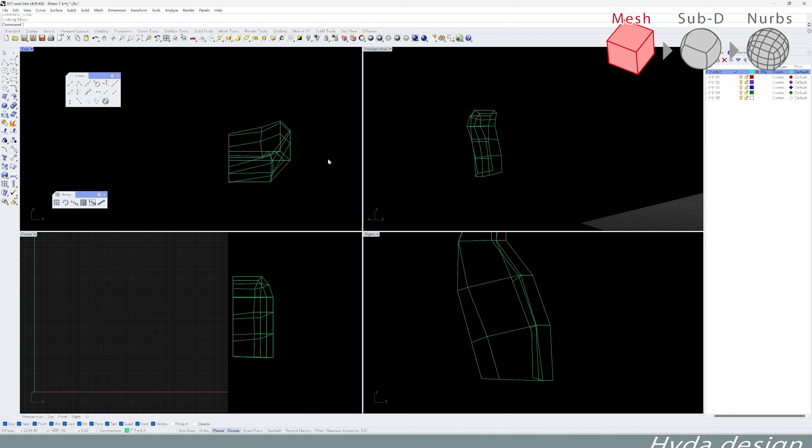Today's main content is the presentation of modeling research.

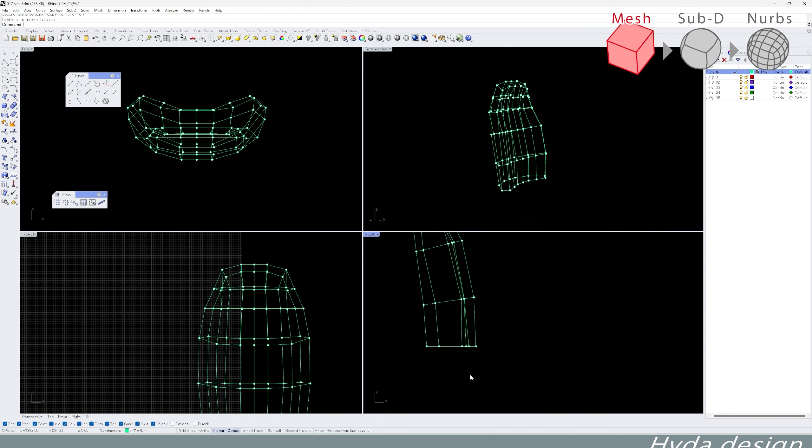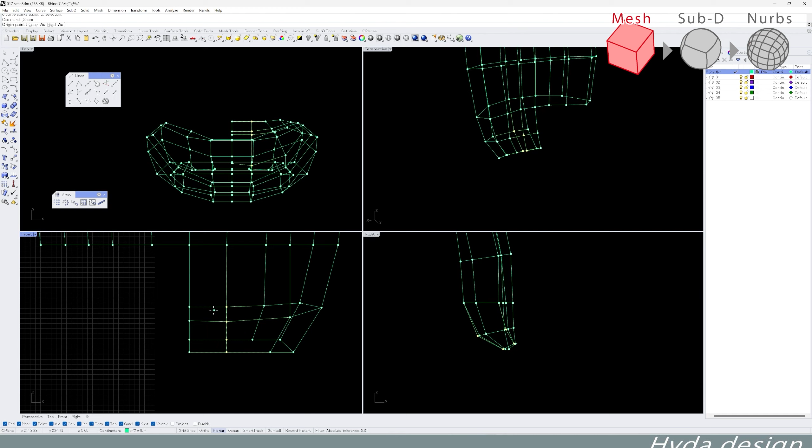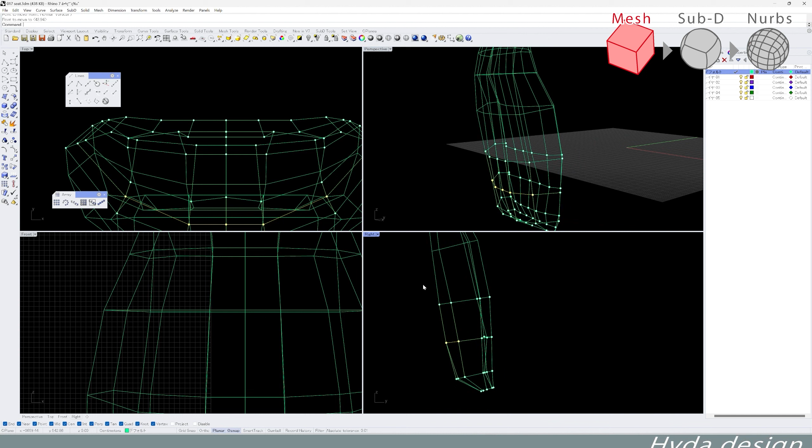Last time, I introduced a method of creating a mesh from a wireframe, then converting it to subdivisions, and then converting it to a NURBS surface. I thought it would be easier to understand if the method had a name, so I tentatively decided to call it the three-shift method.

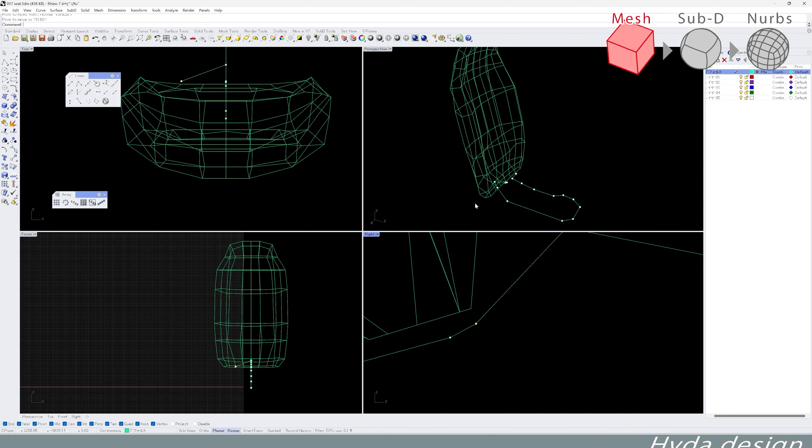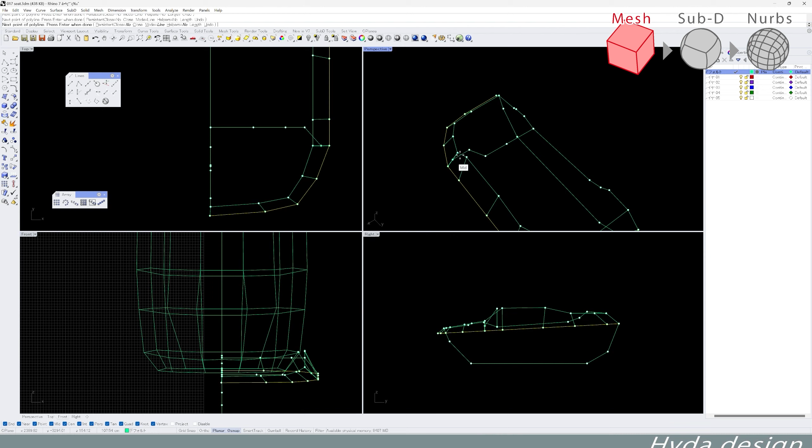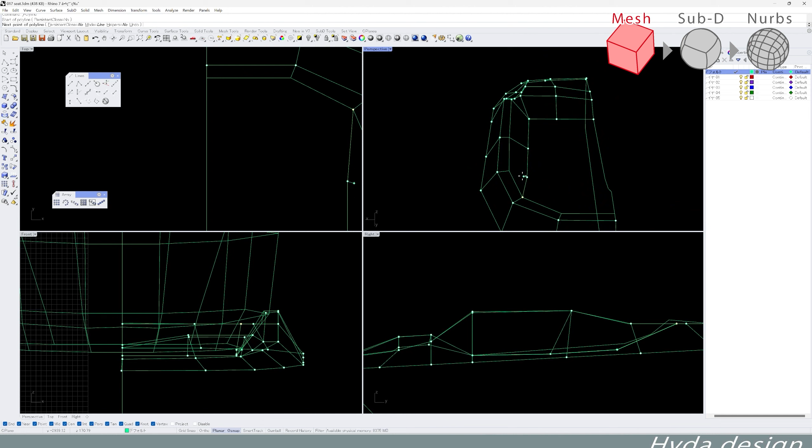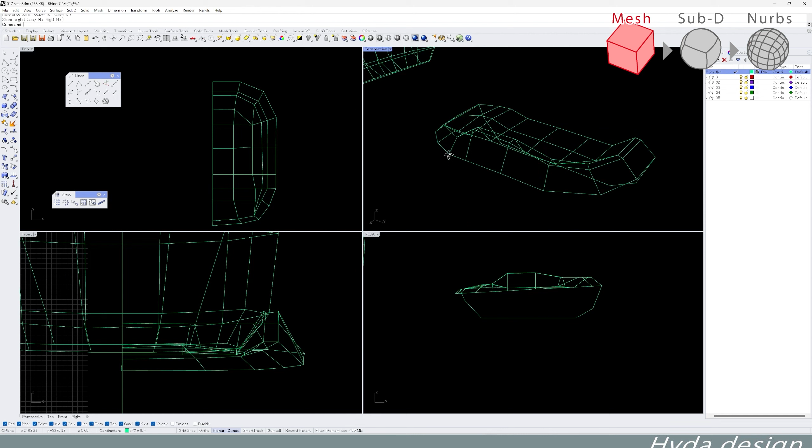Now I'm creating wires to make the mesh. I think the advantage of this is that it is to draw a line on 3D. To create a mesh with Blender, we need to add lines of mesh one by one, but I think this method is intuitive because we can draw lines directly with this method.

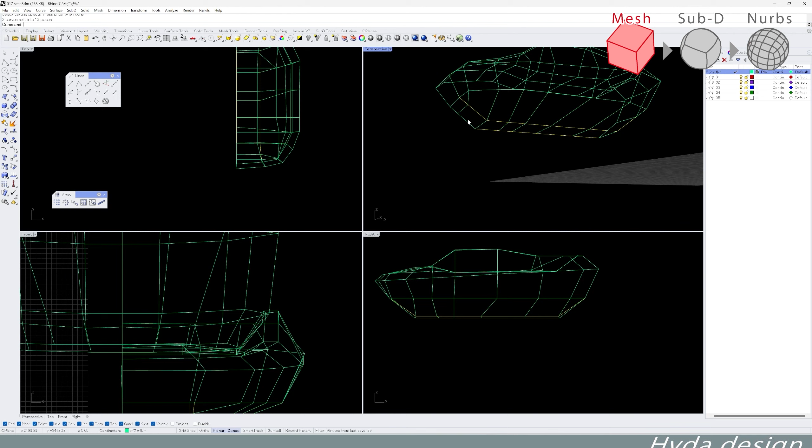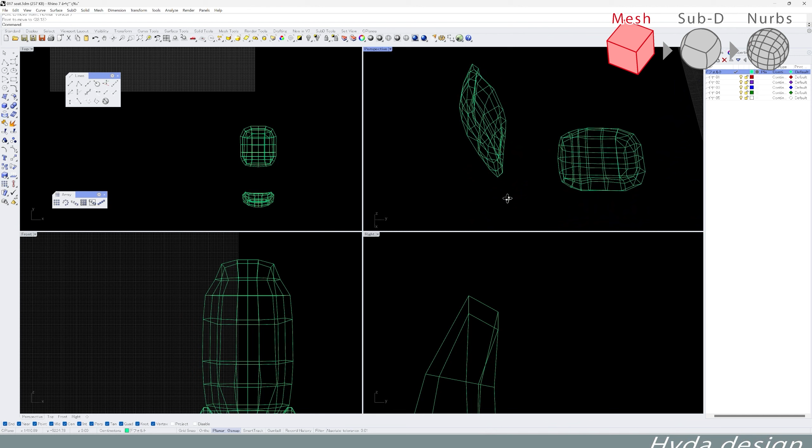We can create a style while balancing the contours in the space. This has the function of a rough sketch. Therefore, I think it is suitable when you want to design while exploring the original shape instead of tracing.

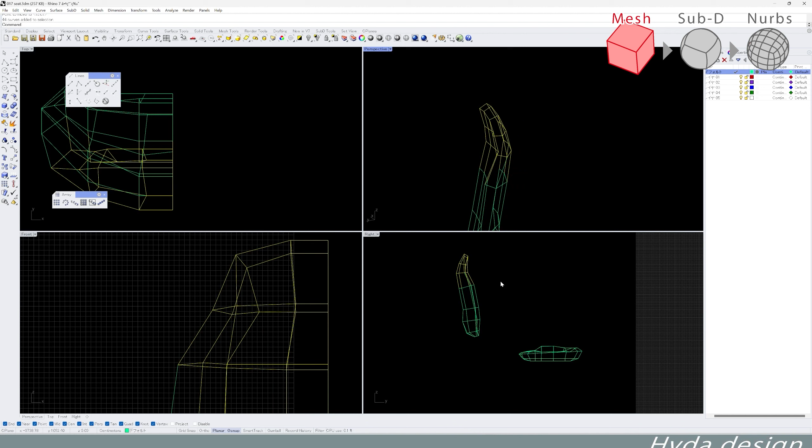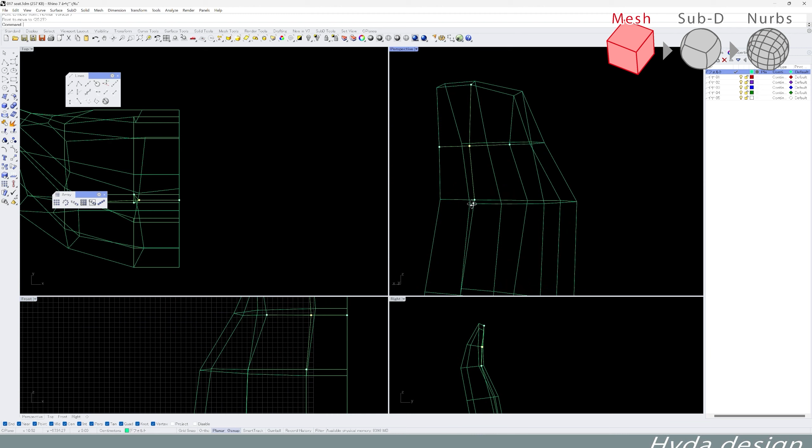And the alignment tool is useful at this time. You can create a smooth mesh by displaying all the points and using the alignment tool to arrange them neatly on a straight line, and then using shear and rotation to create a shape. That will also lead to creating a clean subdivision surface afterwards.

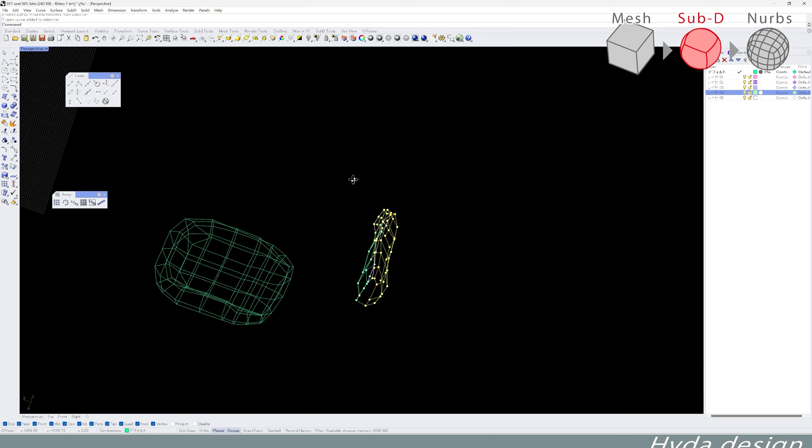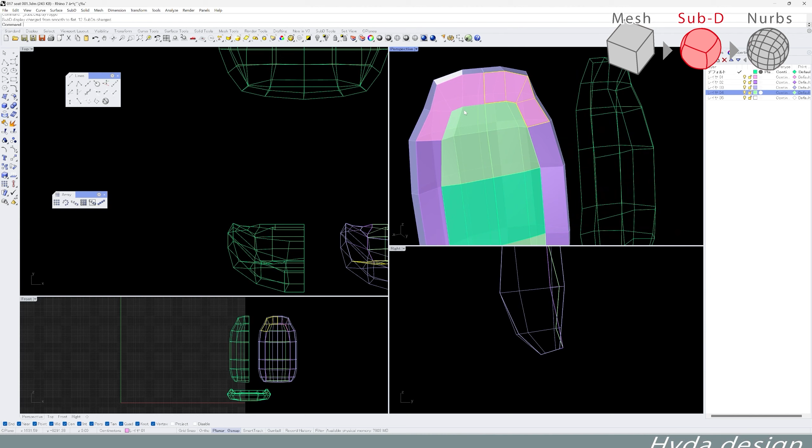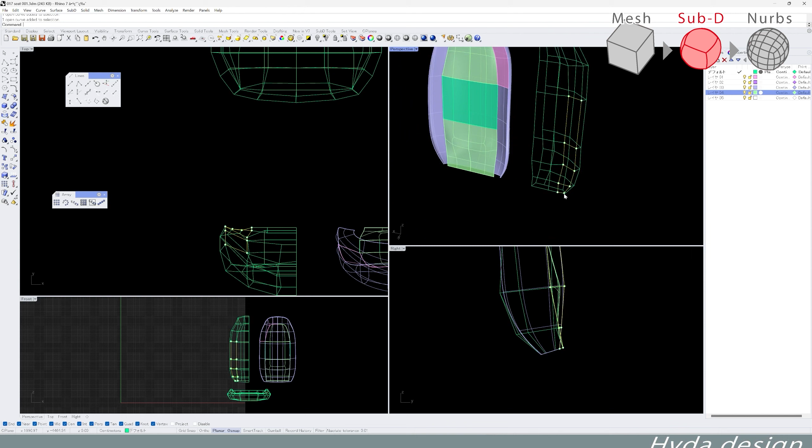Entering the subdivision phase. Edge lines cannot be expressed if the meshes are grouped together. Therefore, it is necessary to separate each mesh where you want to put out the edge line. So we have to think in advance which edge line to leave.

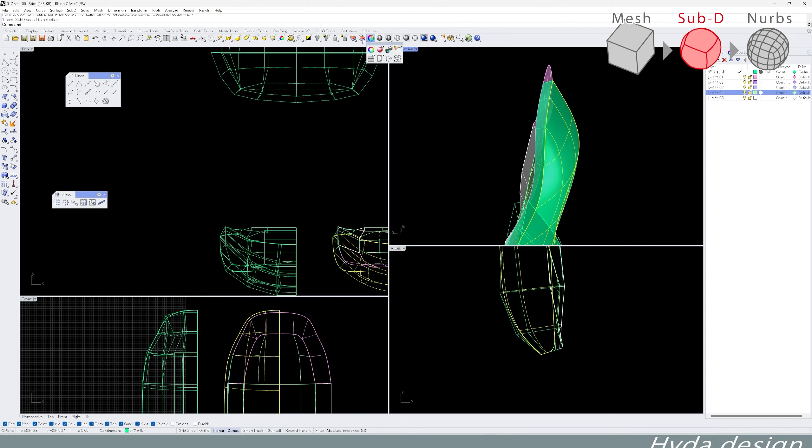This time I want to make the edge of this edge line stand out, so I made the edge part a separate mesh group.

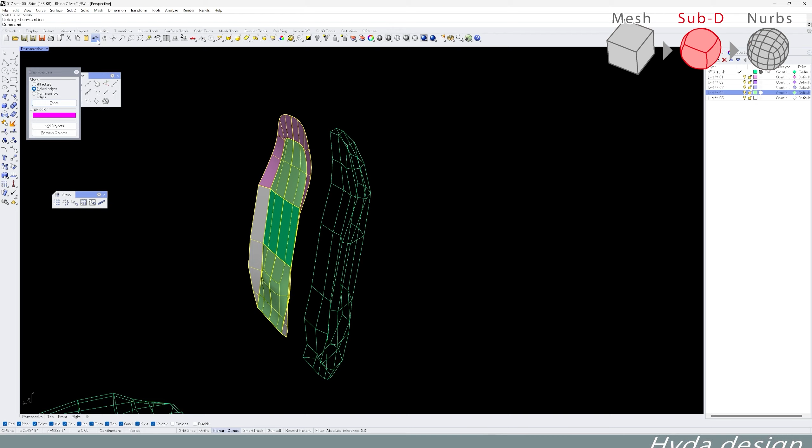I made a mistake in dividing the parts so far, so I'm redoing it.

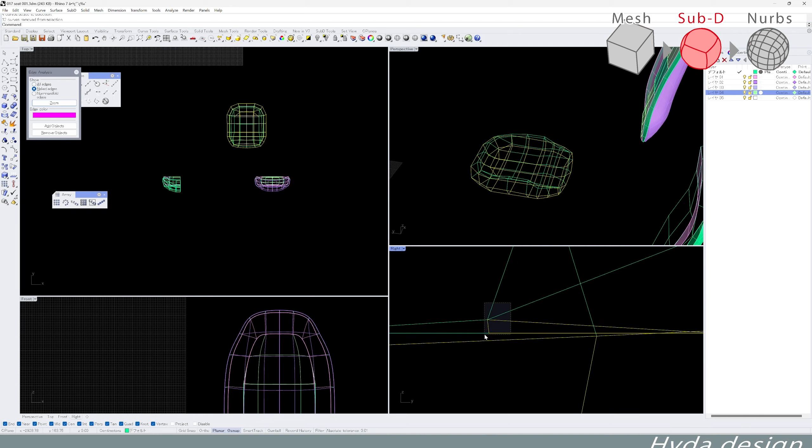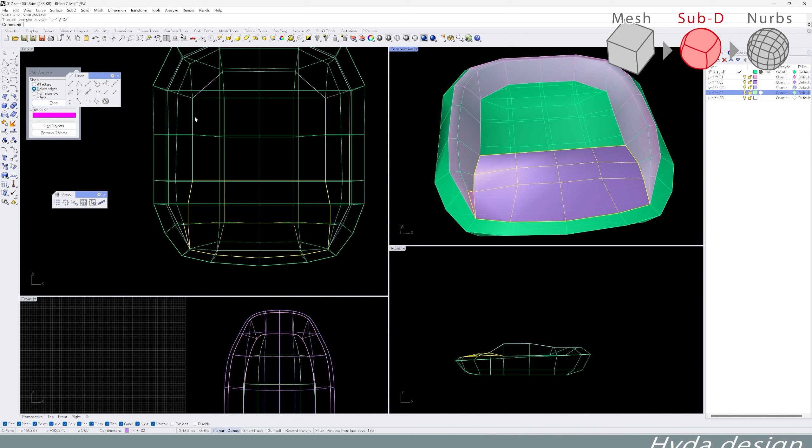Next, attach the mesh to the seat of the bottom in the same way. I create meshes with the image of separating parts with seams as edge lines.

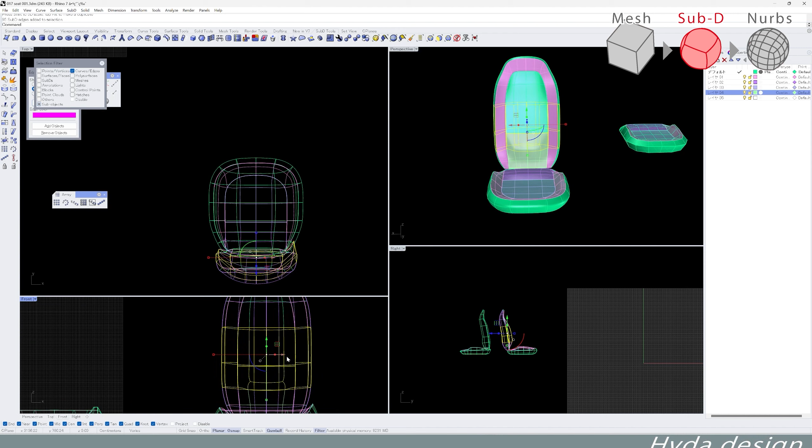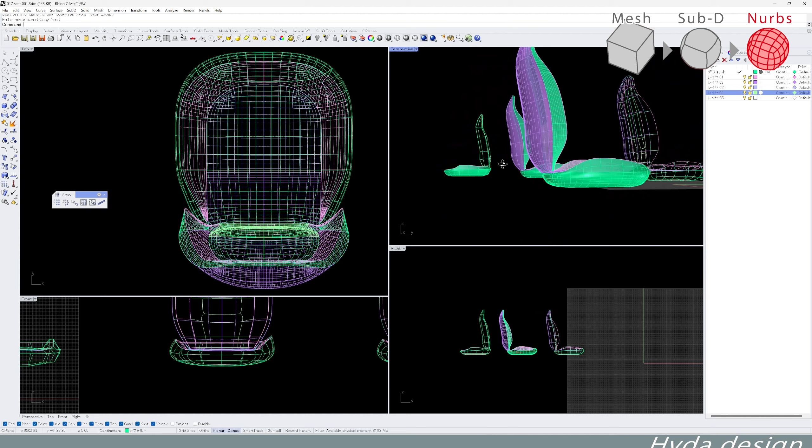In this subdivision phase, the embankments on both sides were not enough, so I used the subdivision editing tool to create the embankment. Such adjustment can be made at this stage.

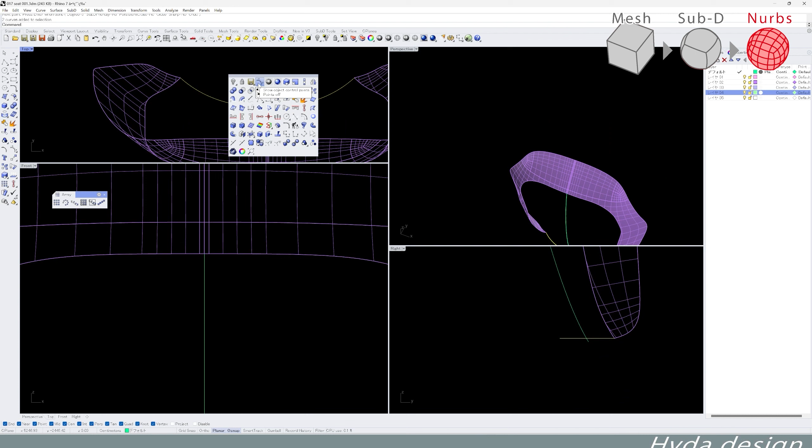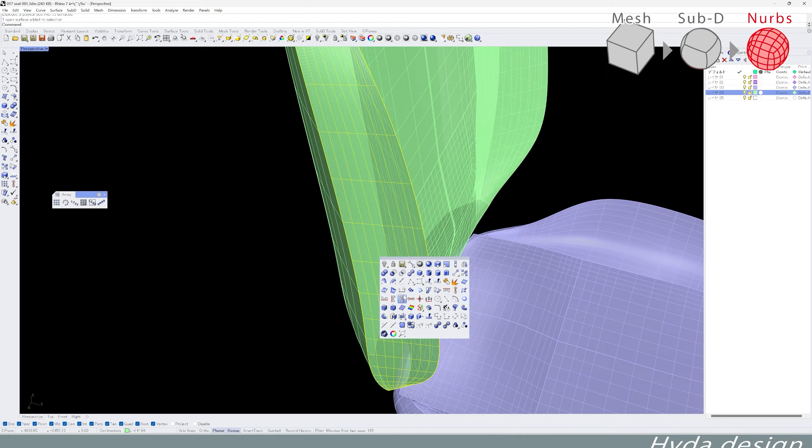Next, we are in the editing phase of the NURBS surface. In order to reduce the volume of the back, I'm going to trim it a lot and reattach the surface. I think the seams of these edge details will be easier to achieve the desired shape.

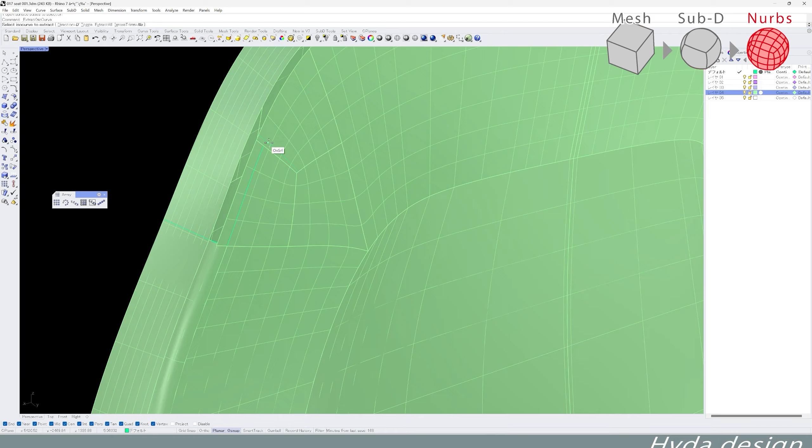Two-rail sweep or network commands are often used in this part.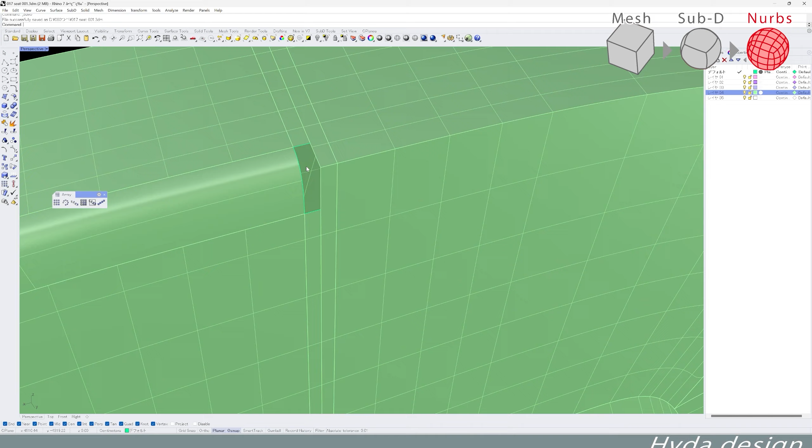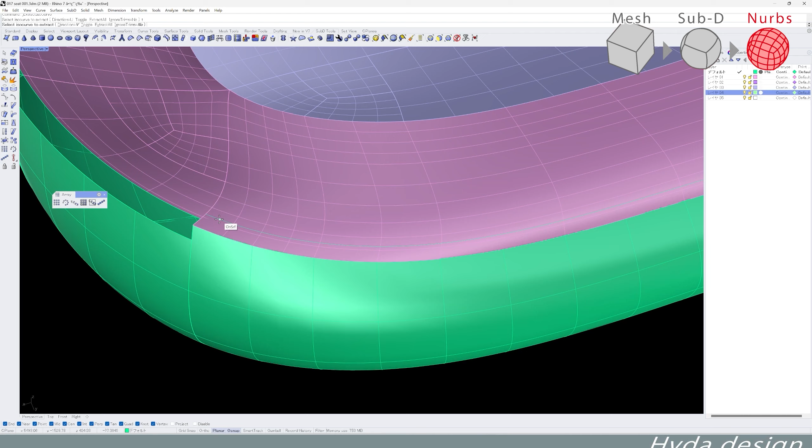I think that filleting in subdivision often does not go as intended because it is done automatically by the algorithm. So at this stage, I think it's recommended to create detail in this NURBS surface phase.

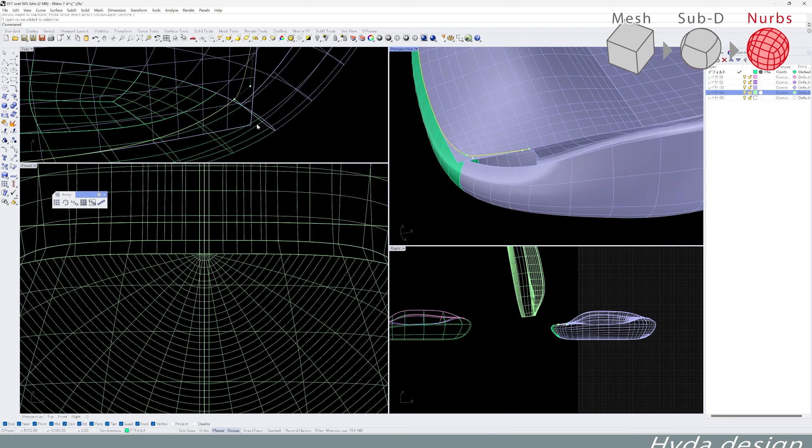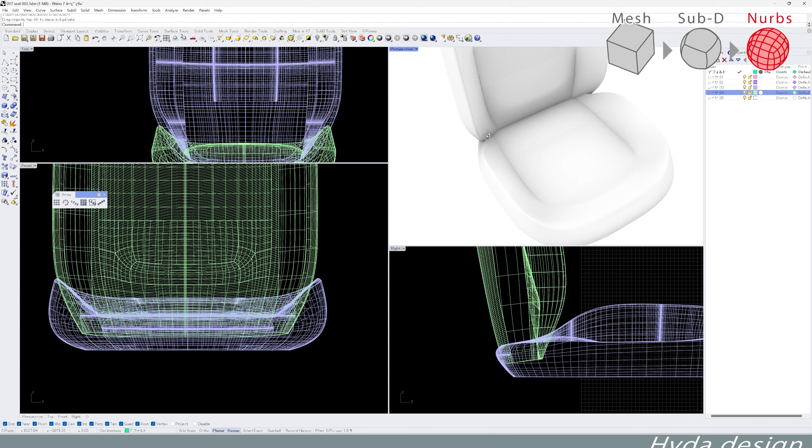If there was such a gap of the edge line, I would like to align it. I think that the cage edit command is effective when making such overall adjustments in this phase.

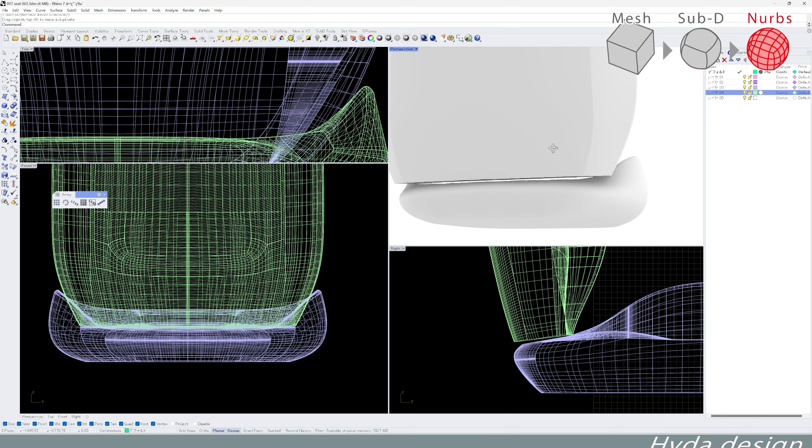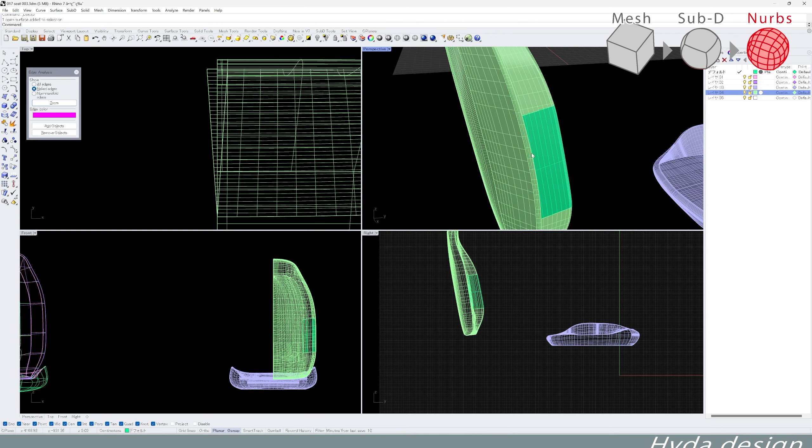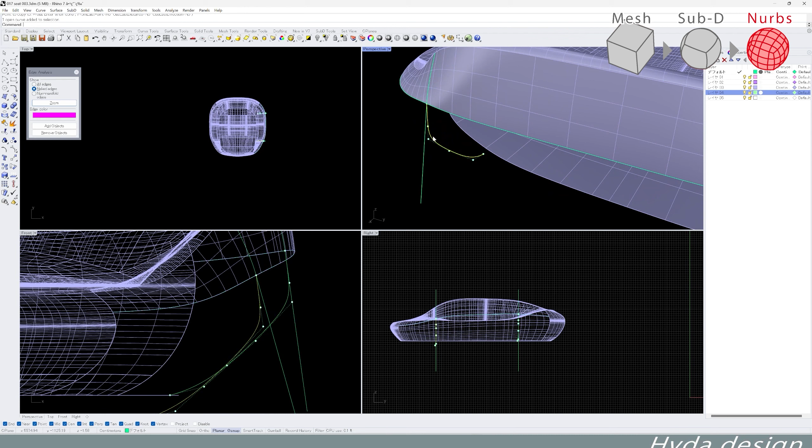The shape of the overhang on this side drew a gentle curve, so I thought when I wanted to make it a straight outline, in such a case, we can adjust by trimming the face you don't like and replacing it with a new face in the meantime.

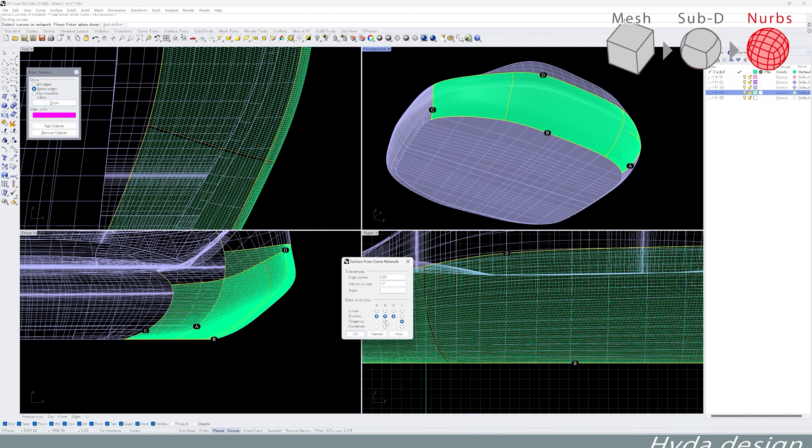If the skill for that change is up at the time of the subdivision phase, such a drastic adjustment may not be necessary for the NURBS surface phase instead of the subdivision.

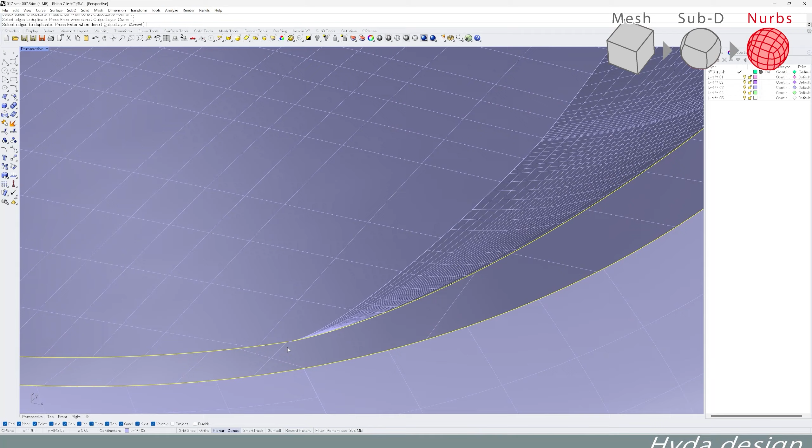Seam modeling can be expressed by trimming the seam location and creating a surface that cuts into it using the two-rail sweep command.

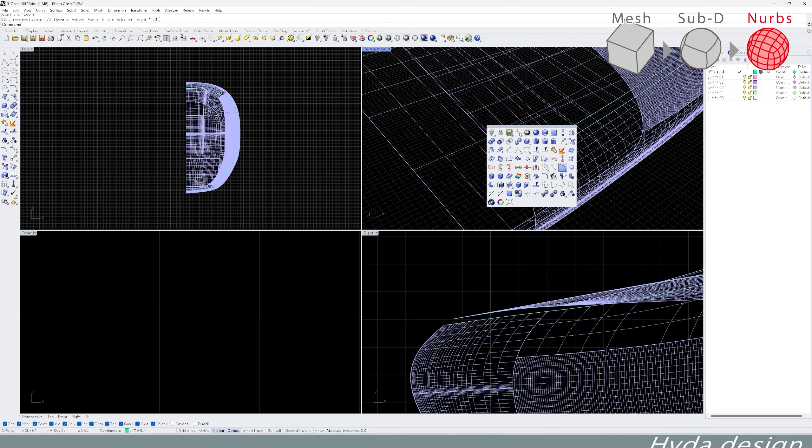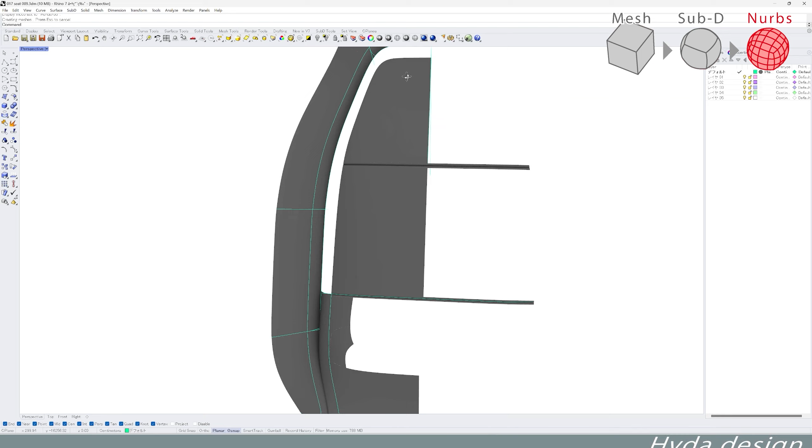The soft material part can be expressed by trimming widely to create a large and deeply depressed curved surface.

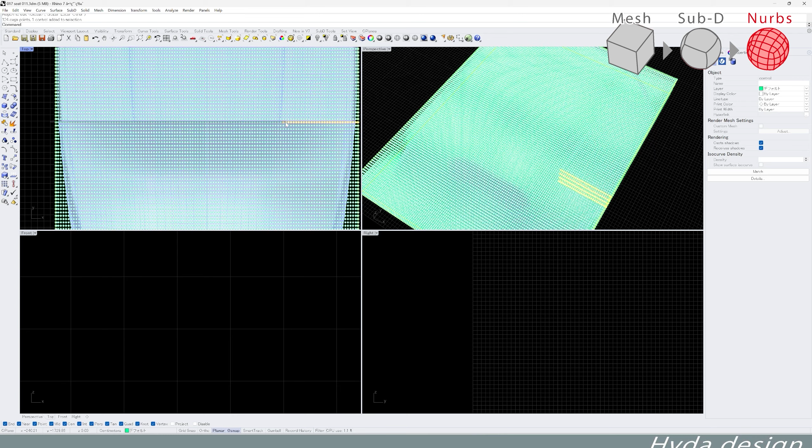In the case of a straight and simple groove, we can easily express the seam by setting the cage edit finely and recessing that part.

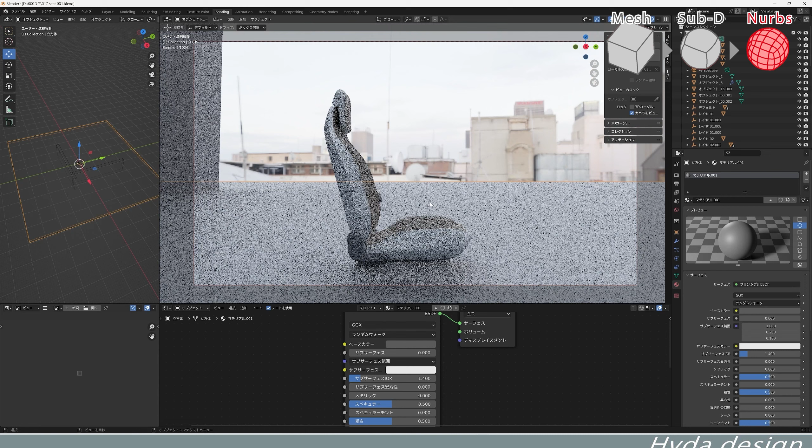I'm going to set color and texture.

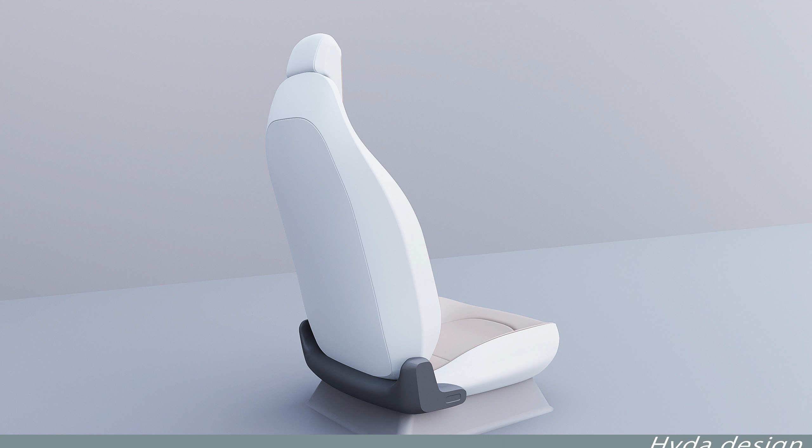The headrest has an L-shaped silhouette so that the two steel pipes are inconspicuous.

I think this kind of style is starting to be proposed. I'm making it based on it.

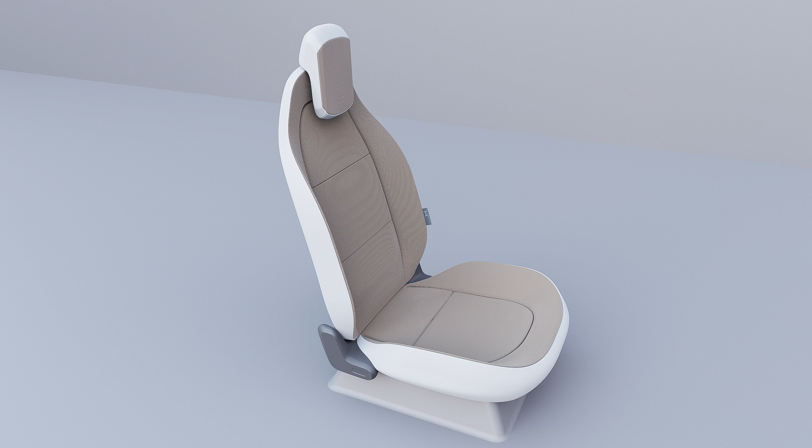I think there are people who like the high-class texture of leather, and there are people who like the gentle image of fabric.

Many people find it difficult to use NURBS surface modeling from the beginning, for products with many curved surfaces that fit the body.